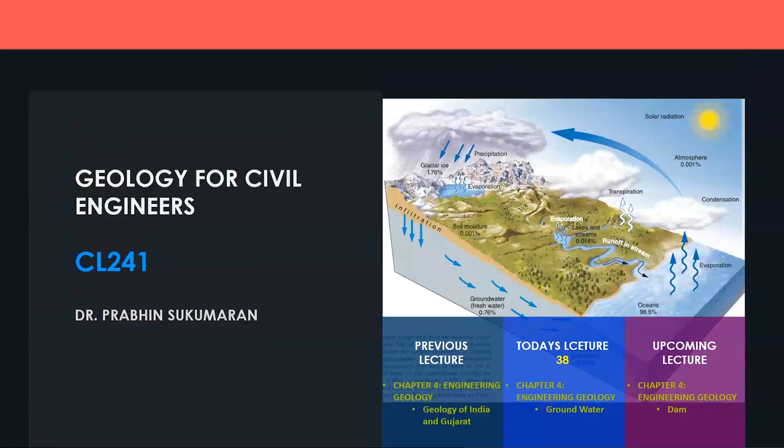In this chapter, we are going to discuss the importance of groundwater from an engineering geological point of view. For example, what kind of groundwater characteristics are important for a civil engineer in terms of construction practices. So we hope by the end of today's session, you will have an idea of the different terminologies used in groundwater which are related to civil engineering practices.

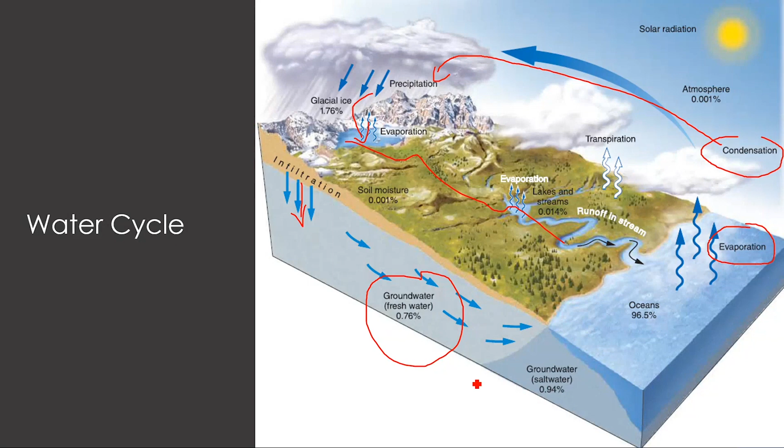Okay, so first of all, this is what we have already discussed, the water cycle. From evaporation from the sea, it goes to condensation, then to precipitation, then water goes to the surface, some water infiltrates, some water flows. So surface water, groundwater, we roughly call this groundwater that forms around 0.76% of all the water existing on the crust or the surface of the earth.

Now if you go to the underground water, what is underground water? The water which is present below the surface of the earth. In this underground water, as we have discussed, there is something called a water table. That is where the underground water is in equilibrium with the atmospheric pressure. Water penetrating from the surface goes to this layer, and below this water table, the water will be saturated in nature.

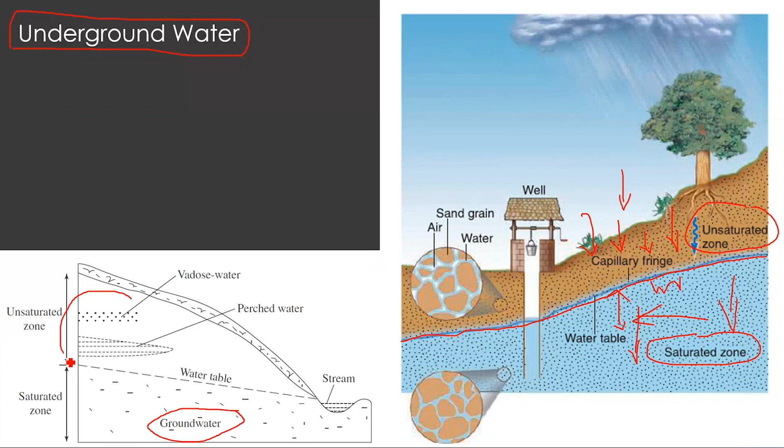So there are basically two zones present here. One we call the saturated zone, and the other we call the unsaturated zone. In the unsaturated zone, the water will be moving downward, and once it reaches the saturated zone, there would be a number of different kinds of downward and horizontal movements of groundwater. But if you see here in detail, the groundwater zone is saturated, whereas in the upper portion, the unsaturated zone, there are two other varieties of water presence. We call them Vadose water and perched water.

So if you see, groundwater and Vadose water: the water which is in the saturated zone we call groundwater. Whereas during the movement of water from the surface to the saturated zone, some amount of water will be stored in the unsaturated zone. The water remaining in the unsaturated zone, stored in the pores and cavities of the soil, we call Vadose water.

Other than that, the other forms of existence of water below the surface we call juvenile water and connate water. Juvenile water is the water which originates from the molten magma. If you remember Bowen's reaction series and the process of formation of rock in the chapter Igneous Petrology, we discussed that magma is a mixture of many different chemicals, and a major amount of water is also present in this system.

So with the process of cooling, the rocks will form, but the water present in this magma, what we call juvenile water, will enter into the rocks below, maybe into the fractures or the cavities present in the hard rock. That kind of water we call juvenile water. The age of this water may be very, very old, from the stages of formation of the igneous rocks, as it is formed from the magma.

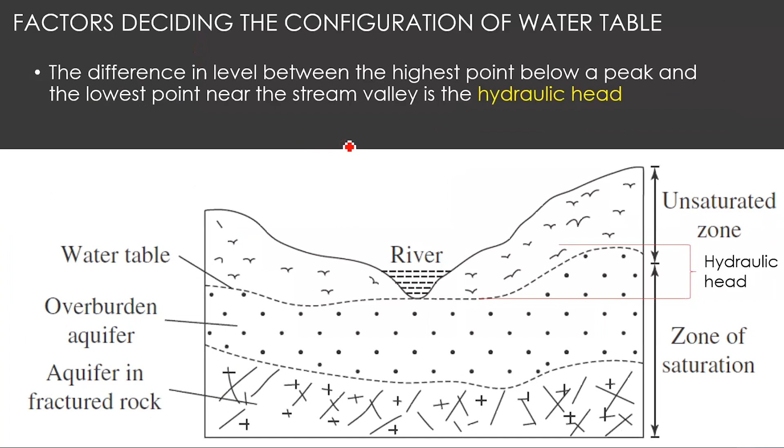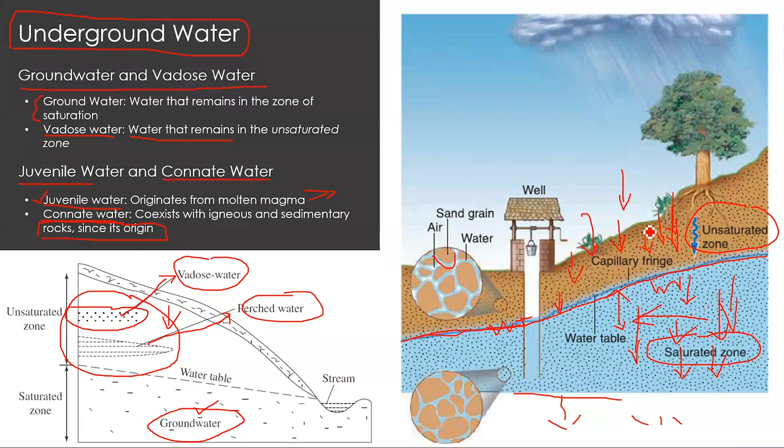So it's nothing complicated. Of the water which flows on the surface, some amount starts infiltrating downward, and through this process of infiltration the water will reach the saturated zone, and the water present here will freely move in the downward direction due to gravity, so we call it free water. But the water which is moving further in the downward direction, where some amount of water is held, we call held water.

So these terminologies, the calculation of the amount of water in the unsaturated zone, the amount of water in the saturated zone, the porosity, permeability, all those parameters would be very essential for a civil engineer to understand before considering the foundation. Because, keeping the foundation at what level? For example, if I'm going for a construction, and I kept my foundation on this part, and just below that I'm having a capillary part.

The capillary fringe is the area where the groundwater is penetrating through capillary rise. When I put more pressure on the soil, the capillary rise will increase, and the water will penetrate more and more into the soil, and that will reduce the soil bearing capacity. So it is better if you understand the exact level, and if you keep it directly below this, then we get the expected soil bearing capacity. So the chance of change in soil bearing capacity as a result of capillary rise of water is less. So these are other terminologies associated with soil water.

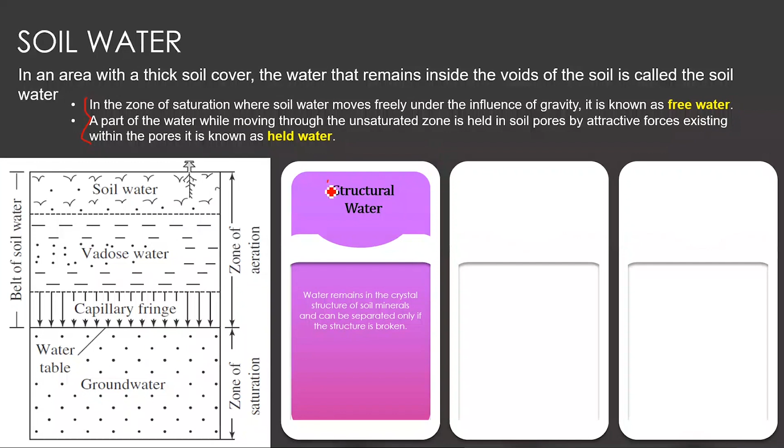Now there is some other kind of water; the water which is present in the subsurface we call structural water.

So this structural water is nothing but the water which is present in the crystal as a process of formation of the crystal. So this water will never come out. This water will remain in the crystal only. Unless we melt it and put a lot of effort to extract the water from the crystal, it will not come out. So that we call structural water.

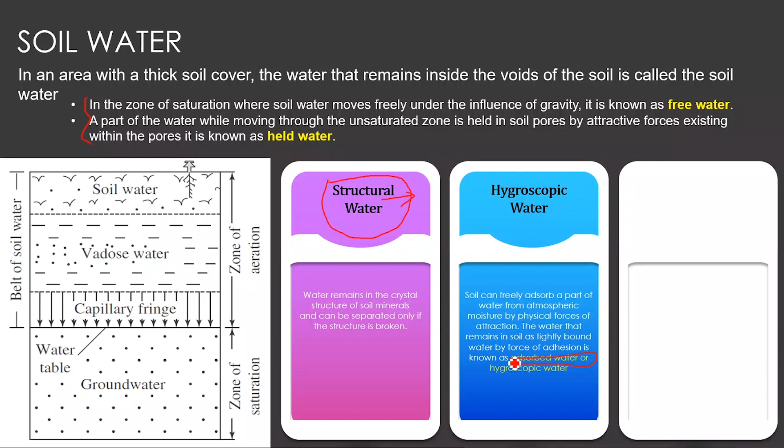And the soil can freely adsorb a part of water from atmospheric moisture by physical forces of attraction. So the water that remains in soil as tightly bonded water by force of adhesion is known as adsorbed water. Some part of the atmospheric moisture will be absorbed by the soil, and that kind of adsorbed water we call hygroscopic water.

Then we have capillary water. This is what I have just discussed. The capillary water is the amount of water which is rising above the water table, which is just the boundary between the saturated zone and the unsaturated zone. We call it the water table. So there would be a small region above the water table where the water from the saturated zone will move upward through the capillaries.

You know what capillary rise is? Fluid moving against gravity through the small voids. So that is capillary rise. Where the water is present in this capillary rise region, we call it capillary water. Okay, so these are the main soil waters, the water which is going to be present in the soil.

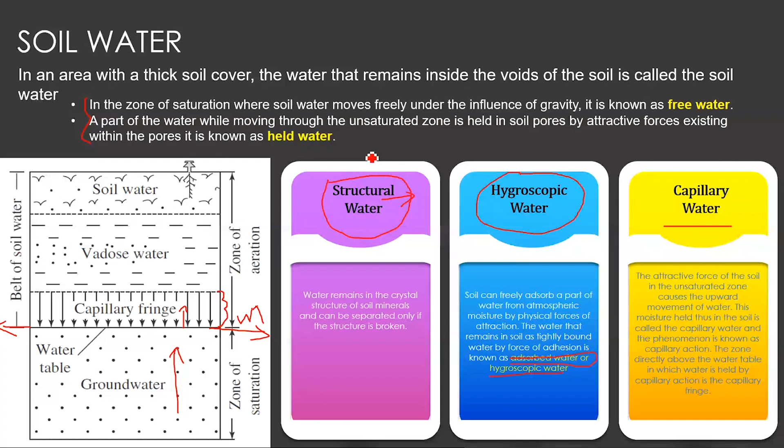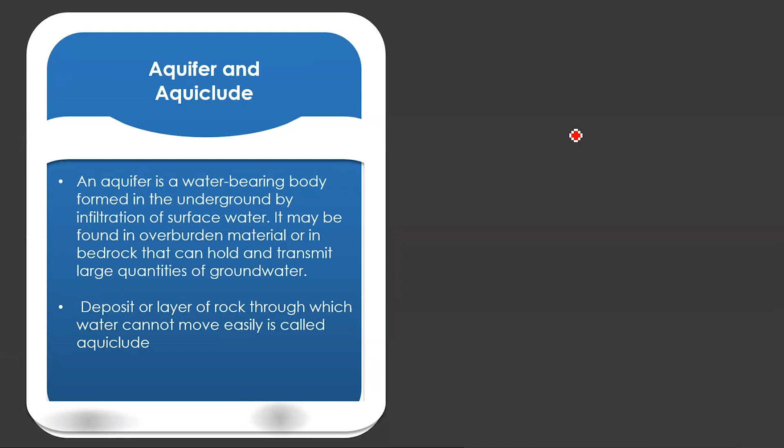Then there are a few more concepts which we call the confined aquifer and the unconfined aquifer. Before going to that, let us see what aquifers and aquicludes are. These are two terminologies which will mostly be presented in geological reports. Aquifers are the layers or rocks which have a high amount of porosity and which have very good permeability also.

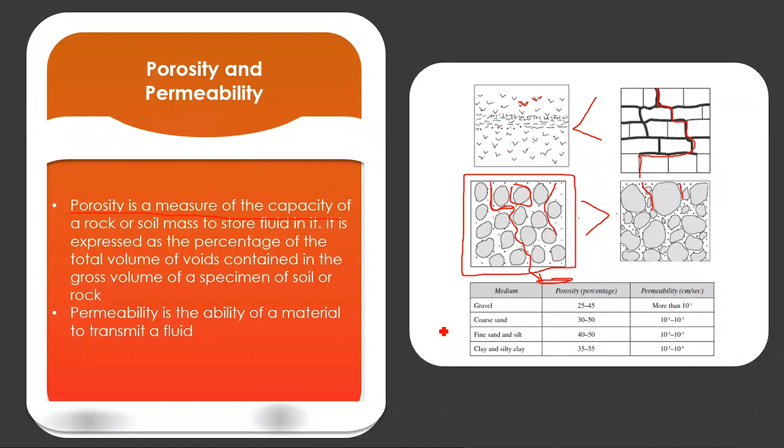If you want to see porosity, take a beaker and fill it with sand. Then add water into it. Some amount of water will go into it. You find out how much water goes in up to the top level of the sand layers. The amount of water which goes into the cavities is what we call the porosity, that is, the void spaces.

Now you continuously pour water into this, give an outlet, and measure, when you put 1 liter of water here, how much time it takes for the water to go out, and how fast the water moves through this layer in centimeters per second. That will give me the permeability. It is the measure of the ease with which water can move through the pore spaces. So this is what we call porosity and permeability.

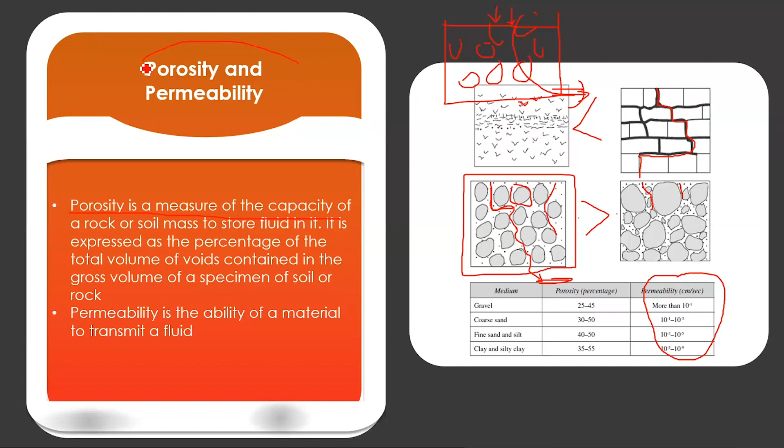And if the rock is having porosity and permeability both, that means the water which is entering into the void spaces can easily pass through the rock, then we call it an aquifer. But if the rock is having porosity but no permeability, then we call it an aquiclude. The best example of an aquiclude is a clay layer.

So if you take clay and put water into that clay, the fine grained sediments less than 63 microns, the clay that we use for the preparation of pottery, water will go into that. We can add a good amount of water, so that means it is having porosity. But if you leave that water to drain out of that clay, it will not drain. It will remain in it.

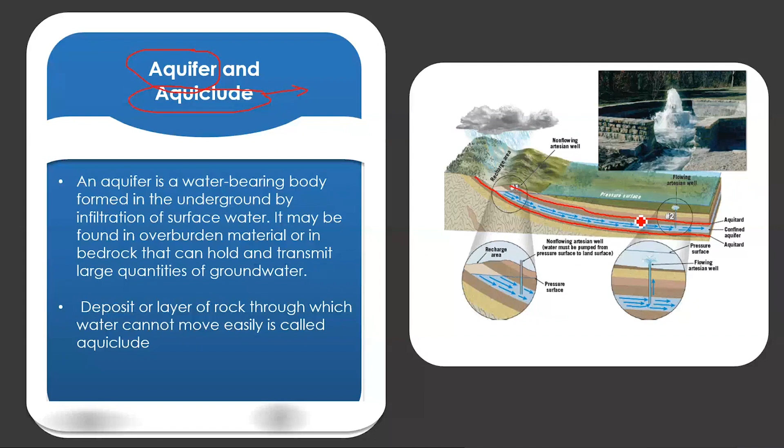So what is lacking in that clay? That is the permeability. So clay is not having permeability, but will have a high porosity. Materials which have high porosity and no permeability, we call aquicludes. But in some situations, these aquifers are of two different varieties. We call them confined aquifer and unconfined aquifer. Why confined aquifer and unconfined aquifer?

See, here in this layer the water is able to move, and above there is a layer which is not an aquifer. It is not having porosity and permeability, so the water cannot move up. It constrains the movement of the water. So as a result, the water bearing layer is sandwiched between two aquicludes or aquitards. Aquitard is also a terminology used for rock which does not have the capacity to move water. It neither has porosity nor permeability.

So if the water bearing layer is confined, we call it a confined aquifer. And if it is the other way, where there is no sandwiching and the upper layer is open, we call it an unconfined aquifer. This confined aquifer situation usually creates a condition we call the artesian well condition. What is that artesian well condition?

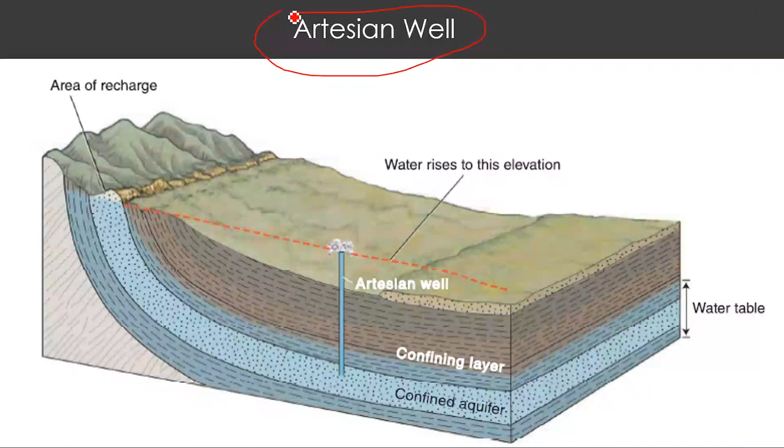Here if you see, this is a confined aquifer. Why is it a confined aquifer? There is a layer which is impermeable and another layer which is impermeable. So water is not able to move upward, and if you see the hydraulic gradient, the difference in height of these two regions, the hydraulic head is up to this level. Now if I make a borewell in this area and it reaches the confined aquifer, the water can easily flow to the surface without any effort. We don't need any water pump, because it will automatically flow through this well.

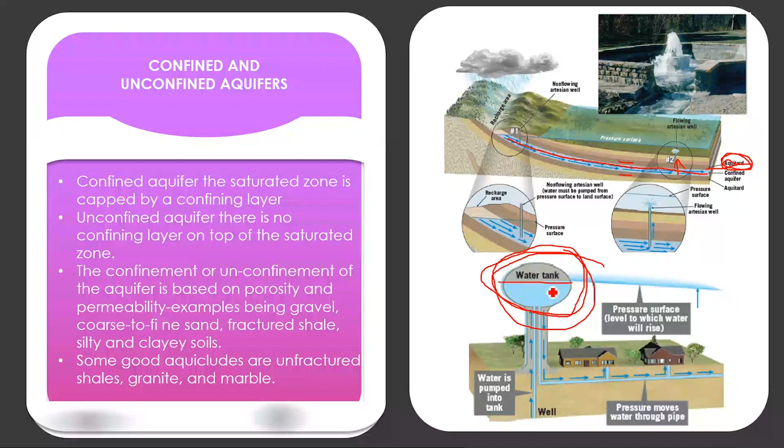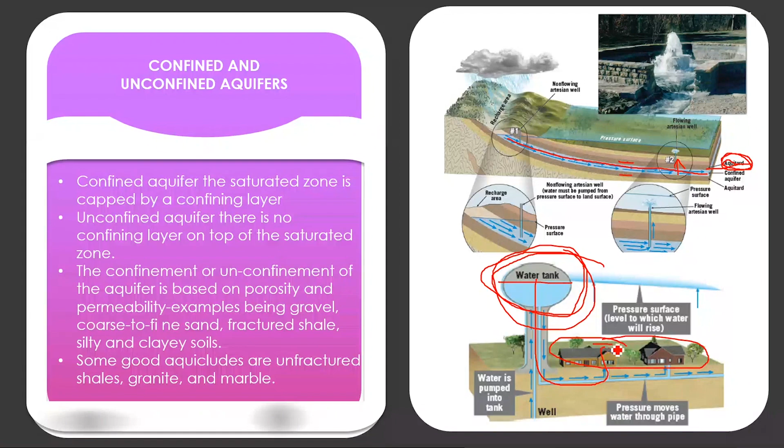The reason is that the hydraulic head of this area is much higher than the head of this well. This is the same thing as the artificial conditions in the water tanks we make in cities. We keep a water tank much higher than our levels, our house water tank. So the water from there will automatically flow. This is an artificial condition and this is a natural condition existing on the surface.

The water below the surface doesn't stay there only; it also moves in the subsurface. The movement of water is usually from higher elevation to lower, but it also moves horizontally. These movements depend upon the amount of water present and structural features like porosity, permeability, faults, joints, unconformities, all the structural features we have studied in previous sessions, which control the movement of water in the region. So having a clear understanding of the movement of this water and its structural features is very essential for any major construction in the region. For that, we'll always have a geologist to help in the process.

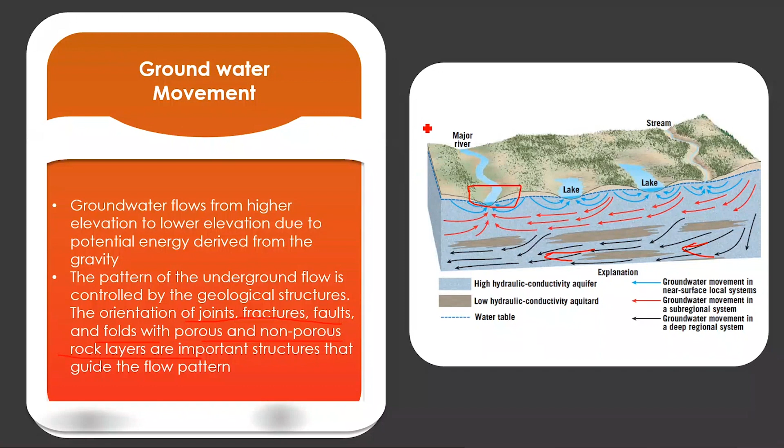But civil engineers should understand the importance of knowing the facts of groundwater movements. All kinds of joints, fractures, faults, porous and non-porous layers, all these things together will be controlling the movement of water. So this water will be moved, and we use different processes to study the characteristics of this water, and finally we will be preparing a groundwater map.

So the study of this groundwater we do at a basin level, where we identify where an aquifer is present and prepare water table maps using the aquifer. We will be studying the relation between the surface water and the groundwater, how much it is penetrating, how it is penetrating. Then we'll be determining the hydraulic characteristics of the aquifer, then the study of the problem of saline water intrusions to that area. All these characteristics we'll be studying at the basin level. So that is the systematic groundwater investigation.

Then along with that, there are areas where the hard rocks are exposed. There also we study the characteristics of the groundwater. A major portion of our country is covered in hard rock terrain, so we need to study the area which is covered in hard rock. In the hard rock areas, how the groundwater occurs and where it is occurring, what kind of fractures, where is the regolith, which we call the weathered profile. All those details will help us to understand the movement of the water, and then we prepare a groundwater map. So these groundwater maps will be available.

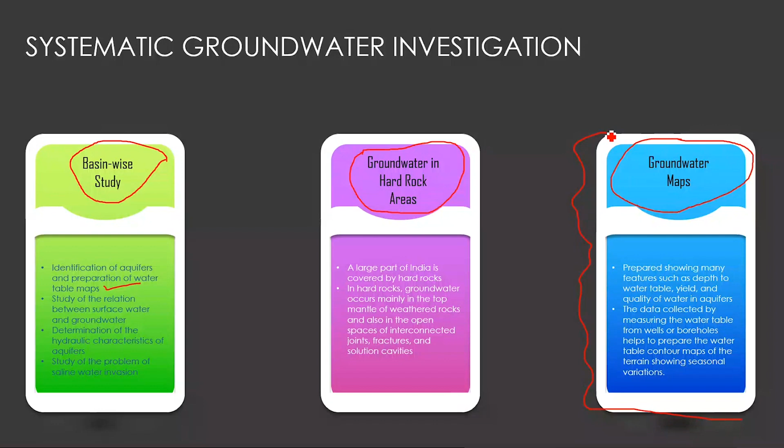If you search the Geological Survey of India site to find the groundwater map, you'll get a lot of information about the characteristics of groundwater. And there is another body which looks into groundwater characteristics, which is the Groundwater Board. They also do systematic mapping of the regions across the entire country, and they prepare the variations of the water table during the summer, during the winter, during the monsoon, how the water table moves, how the groundwater table changes, what is the amount of saline intrusion. All the details will be studied, and we will be preparing the groundwater maps.

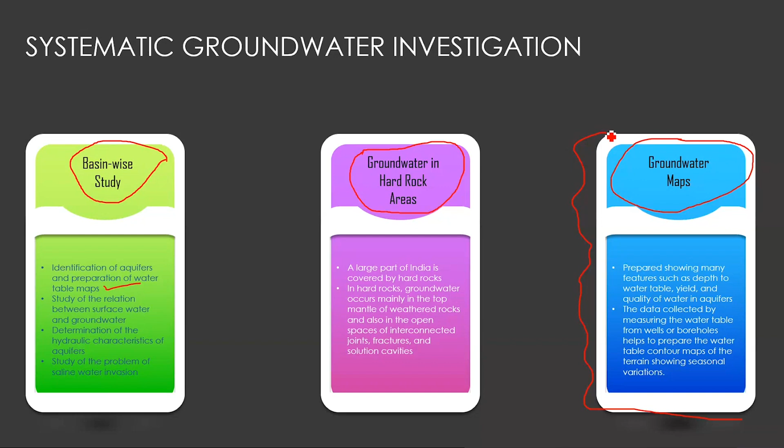So similarly, like the contour map or the geological map, we get another map which is called the groundwater map. That information is also helpful for a civil engineer to understand the basic groundwater characteristics of the region. Influence of underground water in engineering construction. Here we are not going to discuss all civil engineering constructions. Rather, we will be concentrating on the important or major civil engineering constructions like dams and reservoirs.

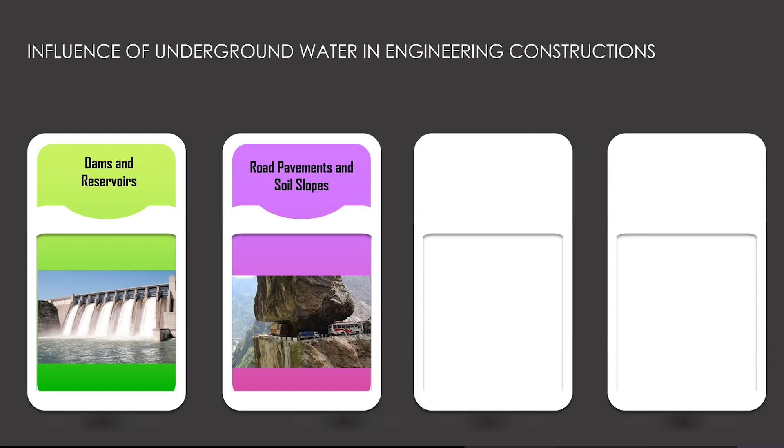Then roads. When I'm talking about roads, I'm not talking about a city road or a state highway. I'm talking about roads which are going to be constructed in tough terrains, like the ones being constructed in the Himalayan terrain. Then the problems in tunneling. Tunneling is another important aspect. In the recent news, you may have heard that the Atal tunnel is the longest tunnel in India constructed at this level of height. That kind of engineering marvel is what we are basically interested in. So what we need to take care of in tunneling would be another topic.

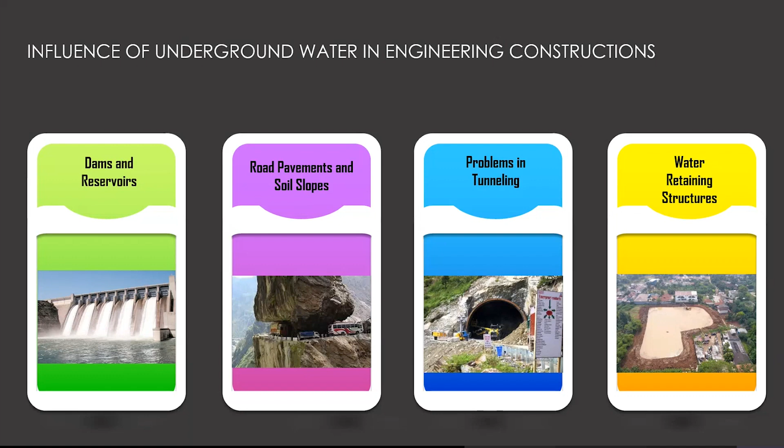Then there are a few water retaining structures. While considering these kinds of structures, it may be a reservoir, a large lake or an artificial lake, or any kind of water retaining structure you are going to construct. So what kind of geological parameters are going to affect them, basically from the groundwater point of view, we are going to discuss in this chapter.

Okay, so first, let us take the dam and reservoir. If you take dams and reservoirs, the major factor which is going to affect the stability of a dam is the capillary rise area. If you remember this image, this is the same image we discussed in the previous slides, where there is a saturated zone.

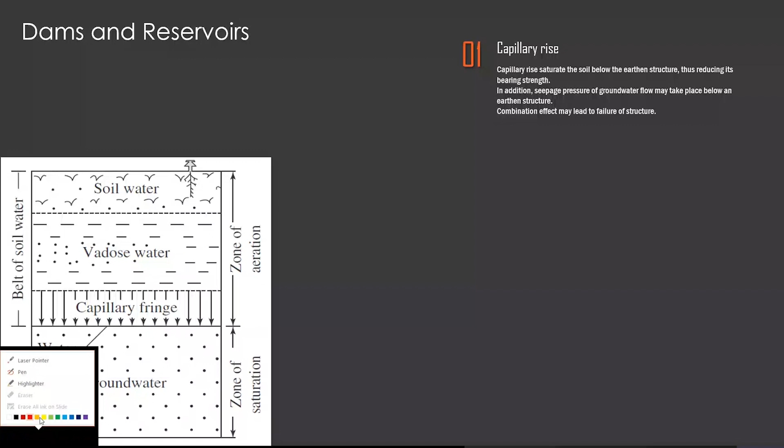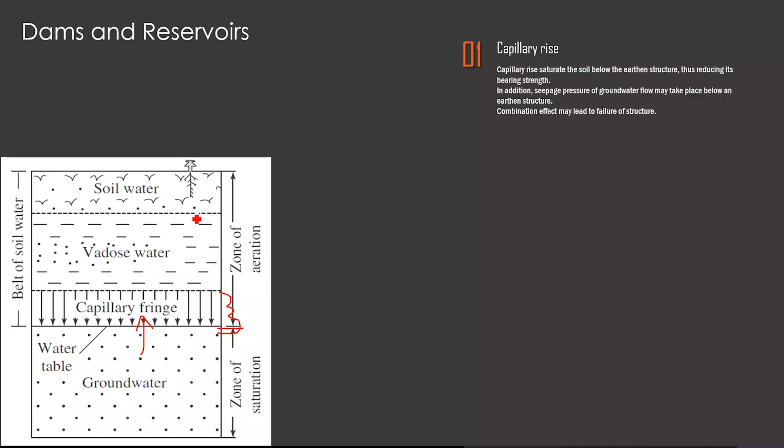Above the saturated zone, there is a small region where there is a capillary rise of groundwater, which penetrates into these pores. Above that is the unsaturated zone, through which water flows as it comes through the groundwater via these processes.

Now, if I'm going to construct a dam and place it such that the basement of the dam is just above the capillary fringe, as a result, the pressure exerted at the bottom will increase, and this will increase the capillary process, the rise of water through capillary action, along with the movement of water.

Seepage pressure of the groundwater flow may take place below an earthen structure. So the structure you construct can create trouble, as the seepage pressure and the capillary rise pressure together weaken the strata under this condition, giving a different water condition than what we perceived during the geotechnical characterization. During that study, the soil appeared dry, but once the structure is placed, the increased capillary rise and seepage water movement together reduce the stability of the soil below it.

The bearing capacity of the soil may be reduced by this activity, and as a result, the structure may fail unexpectedly. So that is one thing.

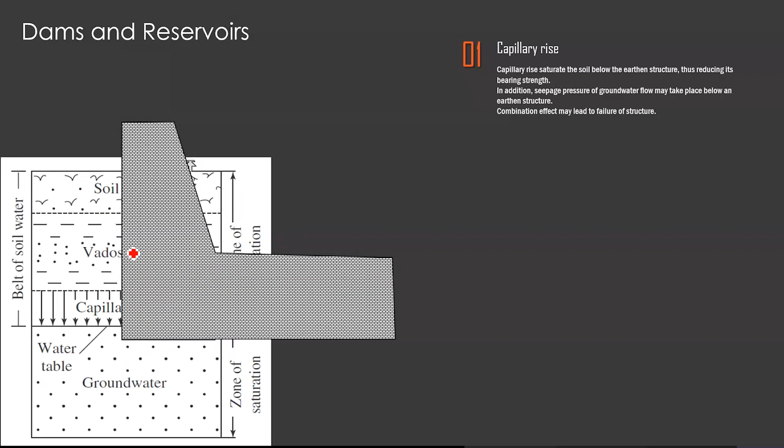The second thing is, the best way to overcome this difficulty is to place the structure comfortably in the area of the saturated zone, avoiding areas that are unsaturated and very close to the capillary rise zone. Placing it safely in the saturated zone means that even with water seepage and movement, it already has the stability expected from the geotechnical or geological study, giving more stability in terms of structural characteristics.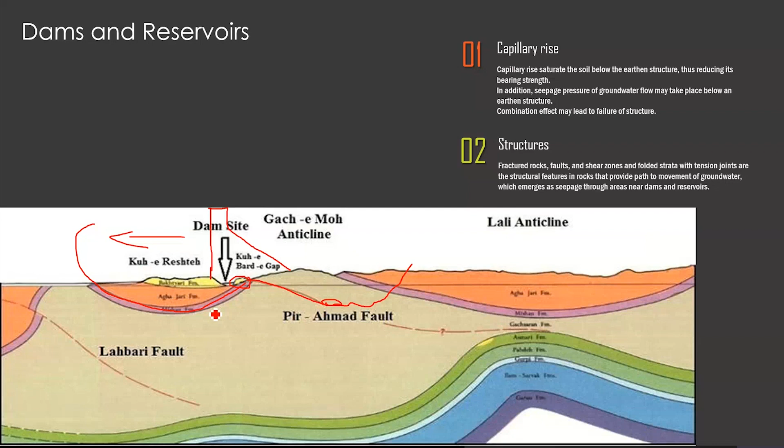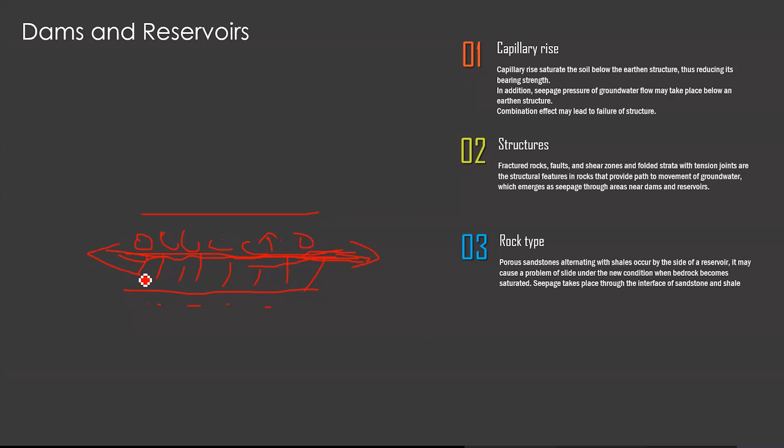Now the next is rock type. Consider a porous sandstone overlaid by shale. As we've studied earlier, shale has high porosity but very low permeability. In such intercalated sandstone-shale sequences, water may move laterally through the contact between the sandstone and shale, because the shale does not allow water to penetrate or pass through. As a result, lateral movement is possible at the contact between the two different rocks, so seepage takes place through this sandstone-shale interface.

So it's best to avoid this kind of situation, or to do proper treatment before considering such areas. Lastly, there is the solution activity.

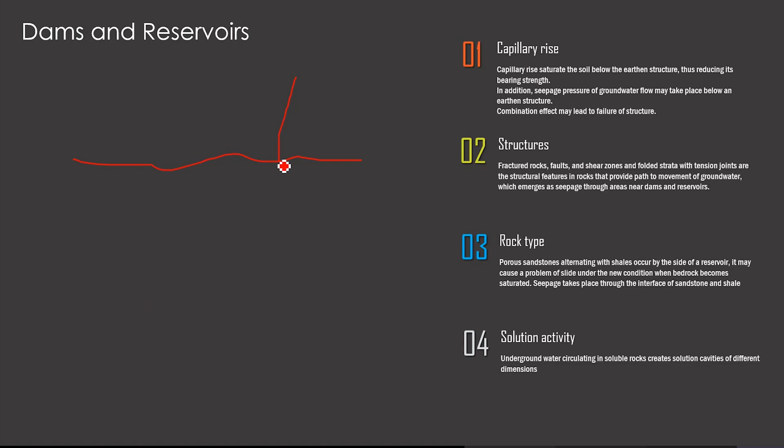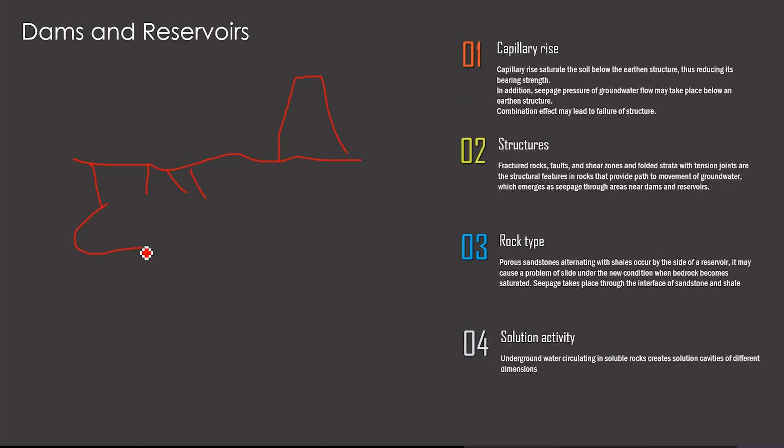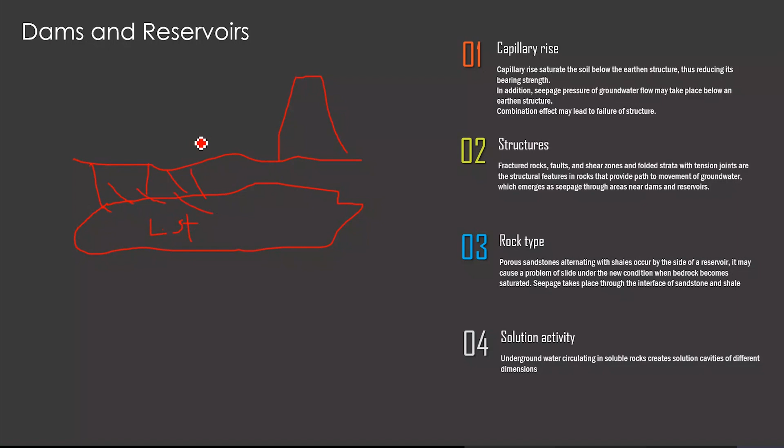If you remember, we discussed karst topography. When constructing any structure in such a region, some water will penetrate the soil through small fractures, joints, or other openings. If the region below has soluble characteristics, such as limestone, it can erode easily with the right amount of acidity, so these limestones can be leached by the entering water. Studying this solubility characteristic of the soil and its parameters is necessary, as it is another effect of groundwater affecting the stability of the structure. So these are basically the characteristics of dams and reservoirs.

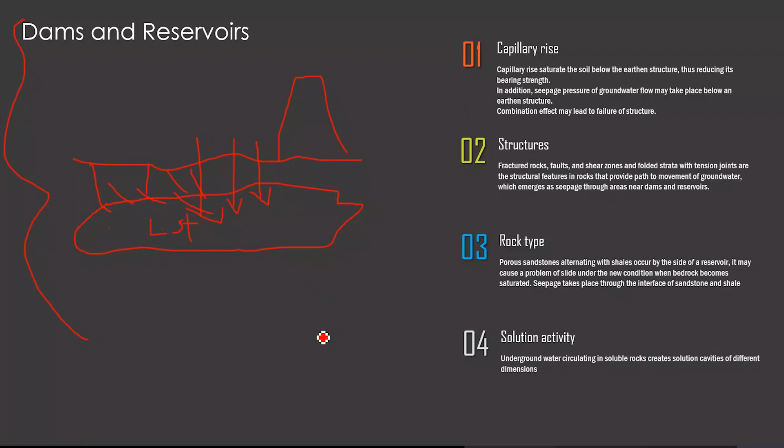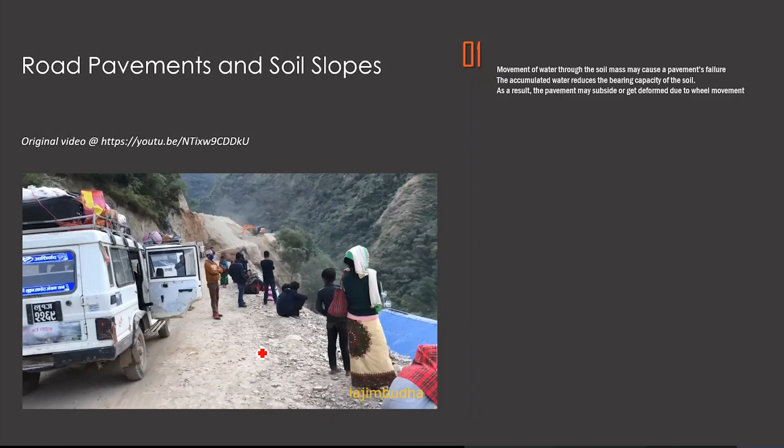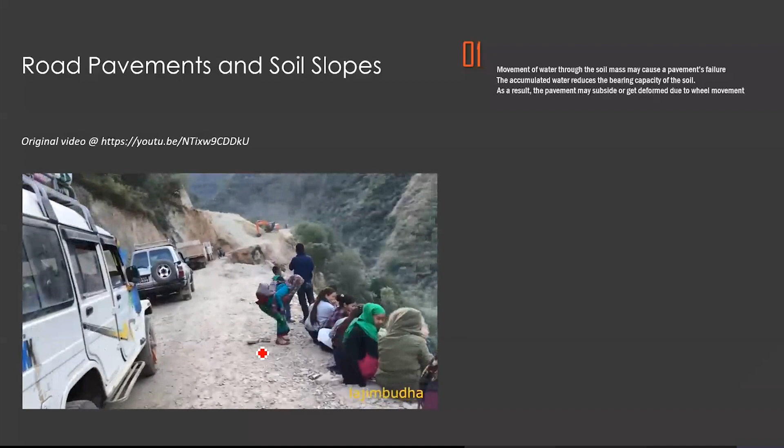Now, when I talk about roads, I'm not talking about roads in a city or a plain area. I'm talking about roads in high altitude regions, or roads connecting the mountain ranges of the Himalaya. That's the kind of road we're discussing.

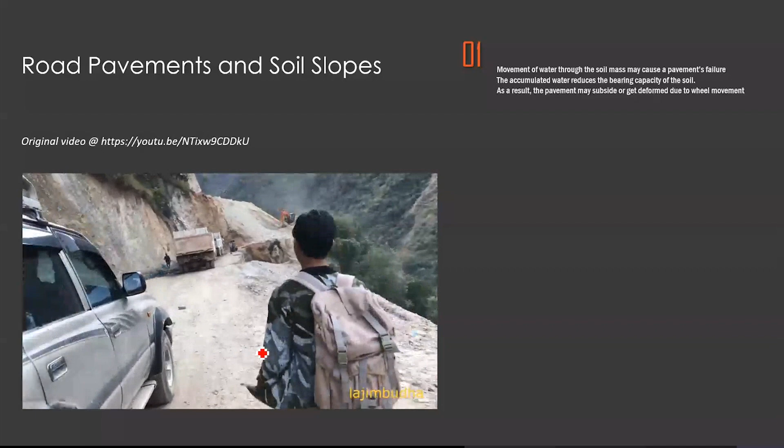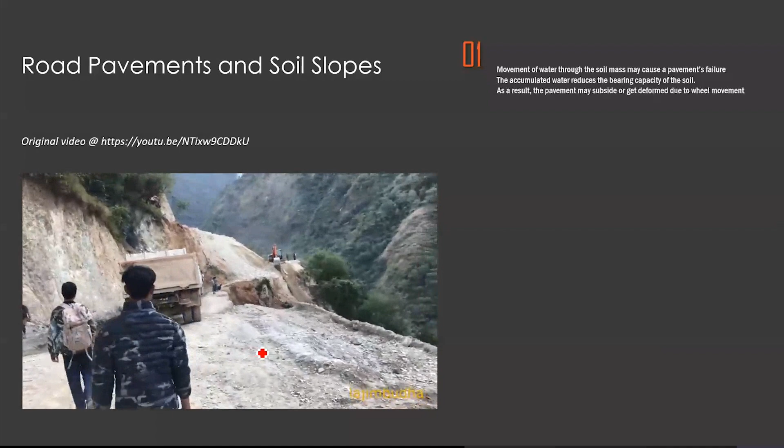The movement of water through the soil mass may cause pavement failure. If the road is surfaced, and below the surface there is soil that easily allows water to move, the water moving through that area, just below the pavement, will loosen the material and create sinkholes in the roads.

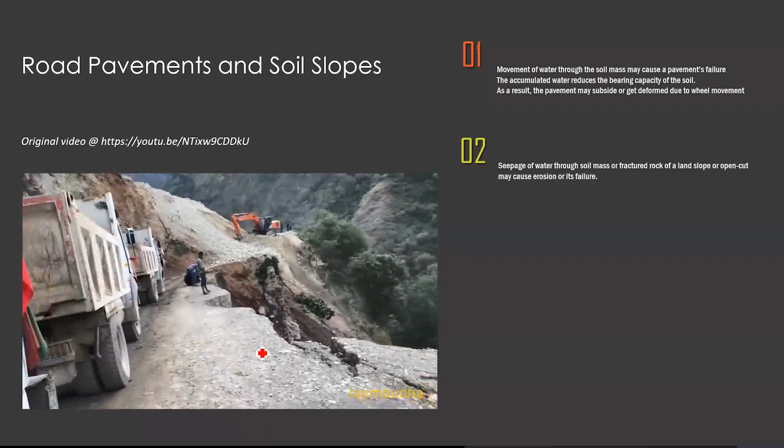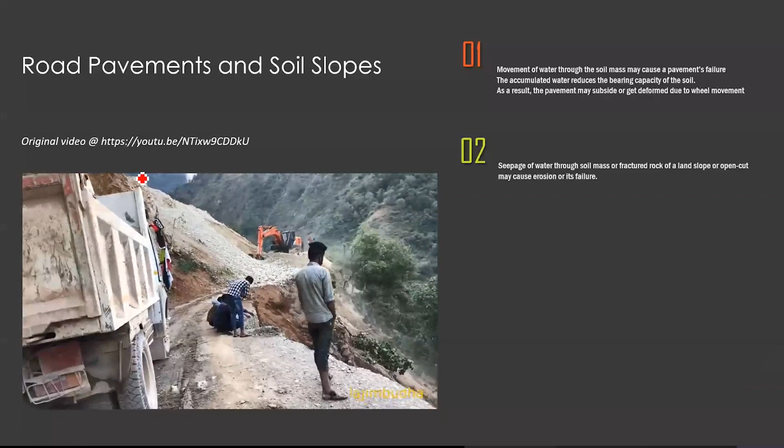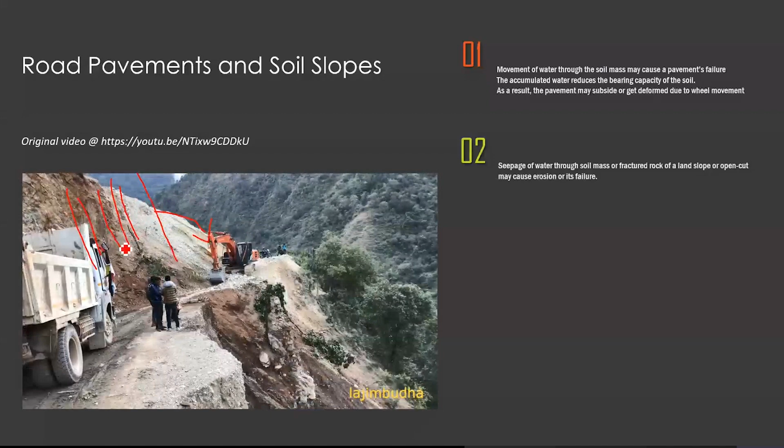Seepage of water through a mass of fractured rock on a landslope or open cut may cause erosion or its failure. Sometimes in the cuttings we make, as you can see in the video, those regions are falling down. If the rocks on the sides have a lot of fractures, water will penetrate into them and create failure of the road. That kind of thing can happen in road construction.

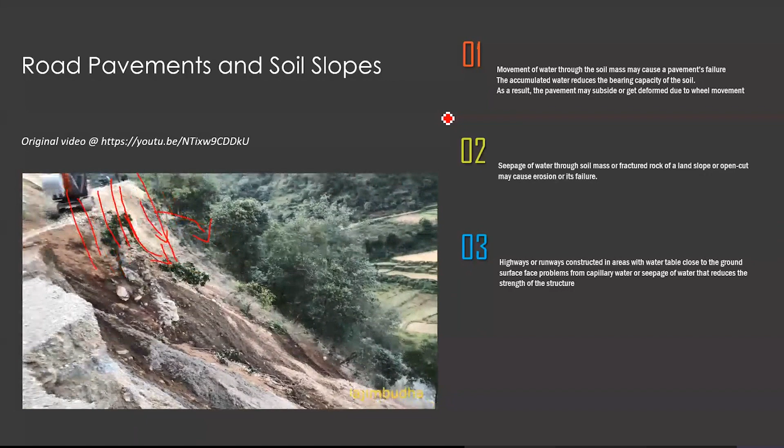Highways or runways constructed in areas with a water table close to the ground surface face problems of capillary water or seepage that reduces the strength of the structure. It is very essential to provide a proper path for this water to escape. If you are constructing a road in this kind of terrain, it's necessary to provide a proper path for the water to leave the road rather than let it accumulate. Proper drainage should be provided.

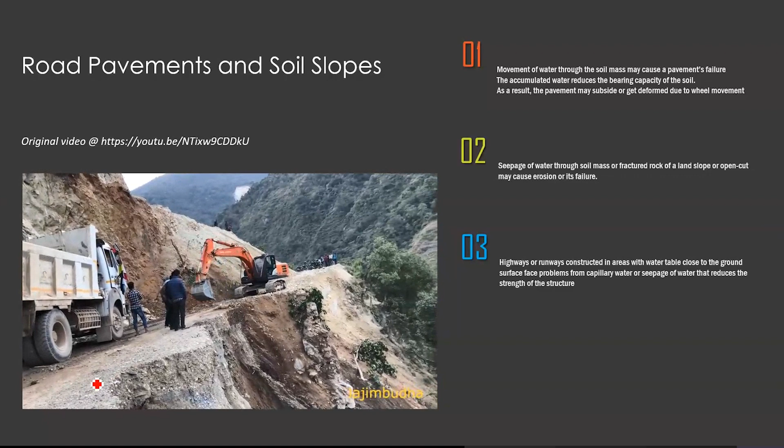Some amount of drainage should be there. There should be layers that easily remove water from the region and prevent water logging in the road conditions. If there is water logging in that area, it becomes a difficult situation for the construction of the road.

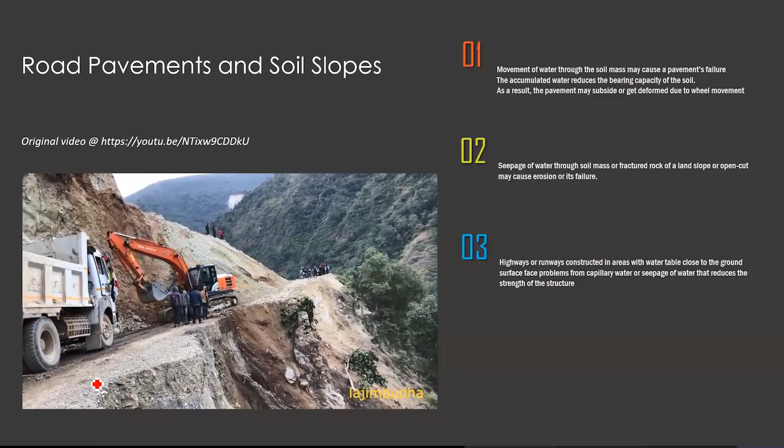Structures like joints, rock types, whether the rock is porous and permeable, whether it has joints, or weak and weathered surfaces - all these parameters together decide the stability of a good road constructed in a terrain.

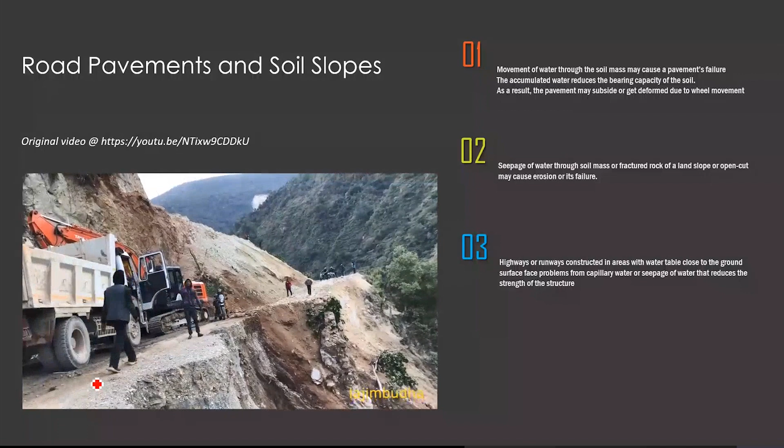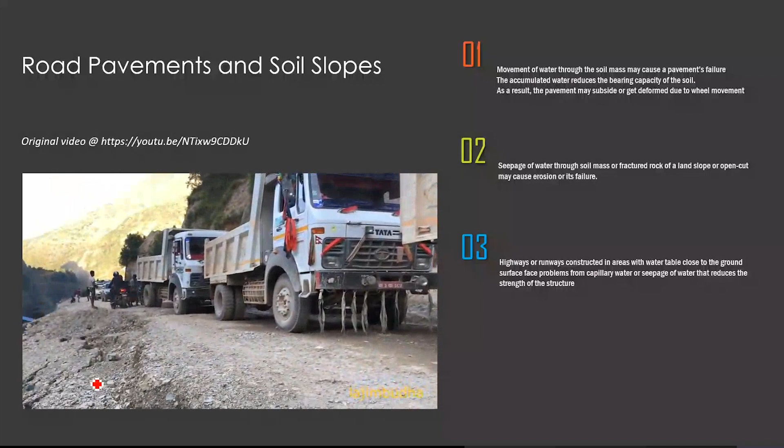See this area - this is a road somewhere in the Himalayan terrain where a landslide has completely destroyed the road. Even the trucks moving on it face very difficult situations, given what kind of road they're moving on. So this is about roads and soil.

Now talking about tunnels - groundwater brings about acute problems in tunneling. As long as the tunnel is dry, that is the most stable condition. But when we intersect the tunnel with groundwater - for example, this is a proposed tunnel route - if there is a groundwater table following this area, that means we are going to construct the entire tunnel in a groundwater region.

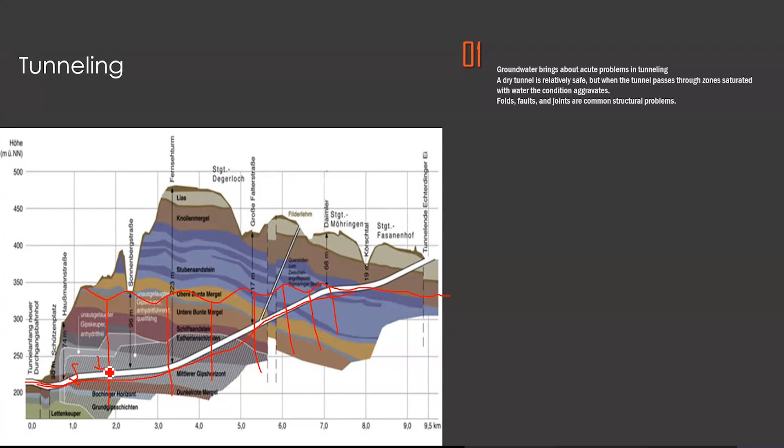This is a very difficult situation, because when we make a small cut, water from the saturated zone will enter the tunnel. There will be droplets of water, or it may be a flooding of water falling into it. So this is a difficult condition.

The best possibility is if the water table is somewhere here and you do the construction above it - that is the best condition, with no intersection of the groundwater table with the tunnel. But situations arise where the water table intersects with the tunnel.

The best method adopted these days is pumping. Before starting the tunnel, we do a borewell and start pumping the water from that area. When we start pumping, the water table goes down. Once the water table goes down, we construct the tunnel, seal it properly, then stop the pumping.

Then again do another tunnel, another well, then do the pumping again, then bring down the water table below the project area or project height, then do the tunneling, then do the proper lining, then stop the pumping. That kind of method we adopt in these situations.

Okay, so for faults, if in some cases there is an area with a water table and a fault present, when you intersect the fault, all this water will go flooding into the tunnel, and that will create a number of different difficulties.

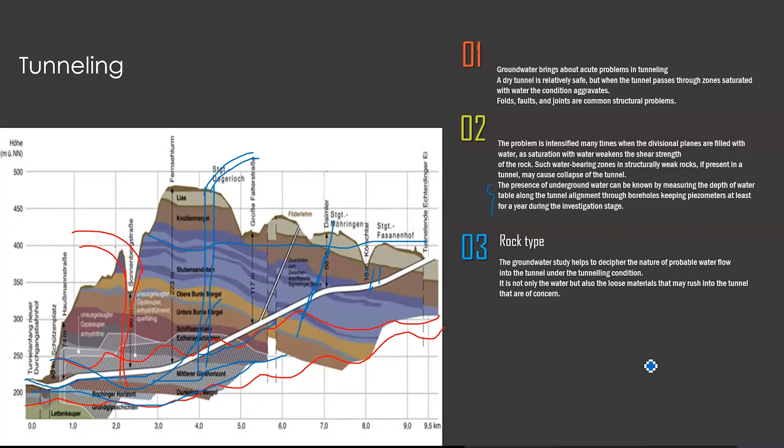Then the groundwater study helps to decipher the nature of the probable water flow in the tunnel under tunneling conditions. It is not only the water but also those materials that may rush into the tunnel that are of great concern. So these are the basic activities of tunneling.

Then in case of water problems in retaining structures, the configuration of the water table and its relationship to the ground surface are very significant aspects in constructing water retaining structures. Surface water percolates through the unsaturated zone and reaches the zone of groundwater, but at places it comes out as seepage water or gushes out as a spring, getting an avenue through the ground. So even this kind of structure needs to be studied for characteristics like joints present.

I remember one of my experiences when I was working with the Institute of Seismological Research. We had a difficult issue. There was one factory somewhere in Baroda. They were having a water retaining structure, which was their wastewater storage tank, something like this.

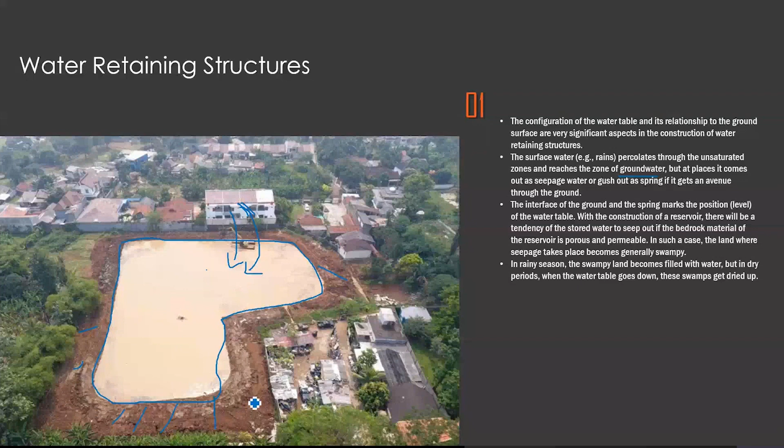They had a water storage tank, and in this, the wastewater coming from the factory, they used to store here for a period for treatment. Something happened to this water storage - it was properly lined, but something went wrong, and the wastewater from this area got into the groundwater.

So once it got into the groundwater, people around the region, when they started taking water from their bore wells, they started getting water that was the color of Coca-Cola or Pepsi. Brown colored water started coming from the water table or the groundwater. It was basically a leakage in this region, but that had totally contaminated the area. The whole region's water table had been contaminated by that pollution.

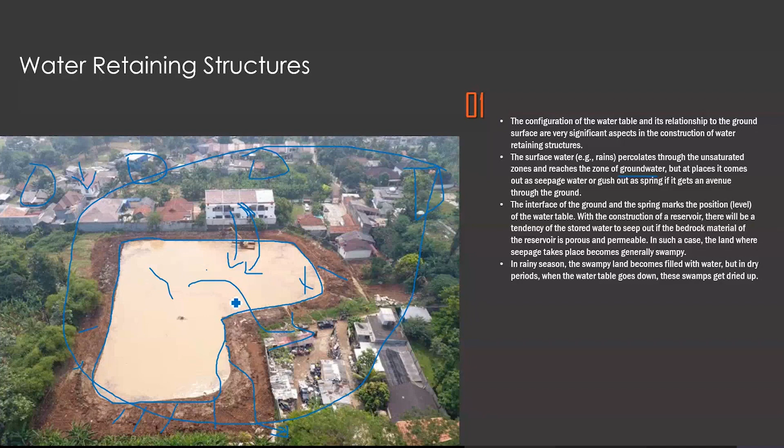So that kind of issue will come if you are not taking proper care. For that, we need to study the groundwater - at what depth it is, whether there is a chance of intercepting groundwater with the storage, whether there are structural weaknesses, joints, faults, or weak planes through which water can leak. Is there any chance of displacement or movement that can create subsidence or breaks in the walls of the structure or storage tank? All these different things need to be studied before finalizing the location for this kind of water retaining structure.